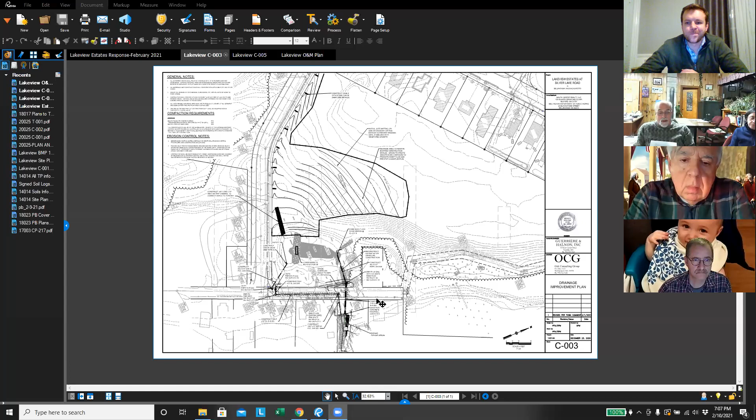So this is the revised plan that the chair was referring to. We briefly talked about it 2 weeks ago. And what this plan does, it expands on some of the improvements that we previously proposed, primarily adding some additional drainage within Silver Lake Road to collect overflow, which may surcharge from the basin during a 100-year storm or extreme storms, to be able to capture that through a new catch basin and pipe that down Silver Lake Road directly to the outlet to Silver Lake.

And one of the thoughts in designing this was to take the burden off of this one inlet, the sediment trap that was installed, I think last year or 2 years ago, which has resulted in some surcharge during extreme storms. So the thought behind this was, again, a kind of belt and suspenders to what we previously proposed, in addition to the additional drainage pipes to convey stormwater from Silver Lake Road to the pond, from the basin, as well as from this sedimentation trap.

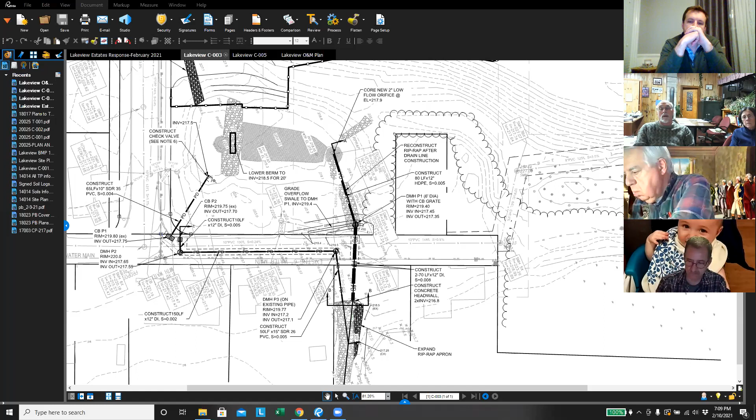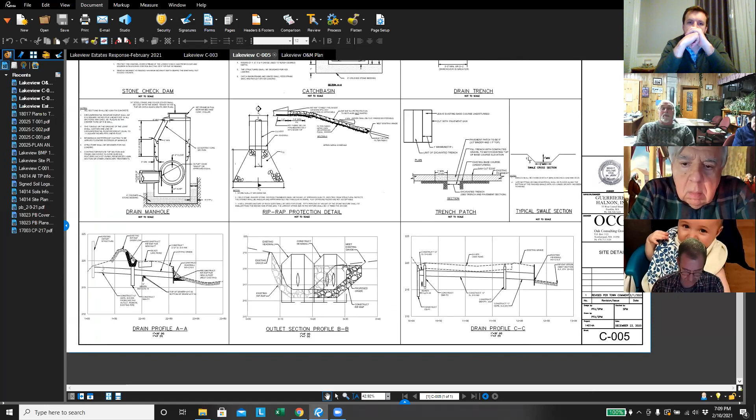We also revised the plan to have a check valve. It's an end of pipe treatment. This was specifically noted by Don DiMartino, something that would be more easily maintained by the town once this is the town's property. So we've added that to the plan. Additionally, we've also added the drainage profiles and sections for the main runs from Basin C, as well as to the outlet to Silver Lake. We also just submitted today an operation and maintenance plan for this whole drainage system.

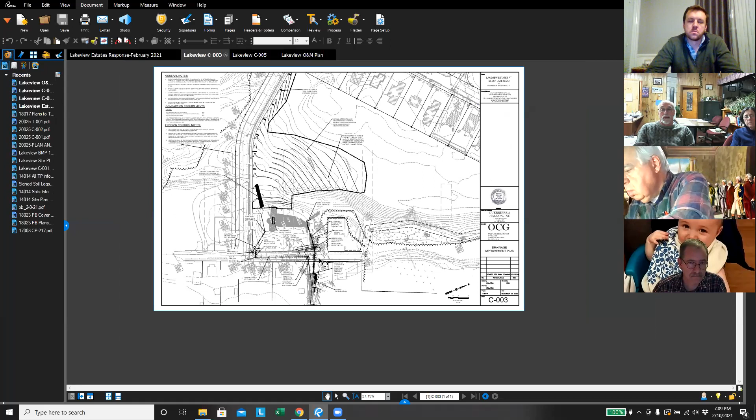That'll help ensure the longevity of the system and be able to maintain it so it operates properly. At this point, as the chair mentioned, we understand BSC hasn't had a chance to fully review this, but we did submit all the calculations in response to their previous comments. I think that's probably about it on my end right now, without some additional questions.

Okay, there was a question that our peer reviewer had relative to review of previously constructed and permitted stormwater management structures. It's the opinion of the commission that the redesign of this basin to correct the deficiencies of the previous constructs renders review of previous iterations of this structure moot. So I don't think that we'll need to have our peer reviewer take a look at what turns out to be well behind us.

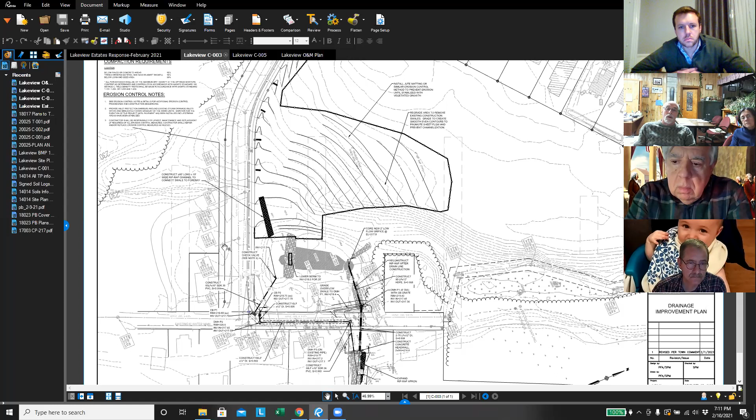It's been our goal for many years to try to correct a situation that has created a lot of hardship for local residents, and to build a structure that will be able to meet and function with the increased volumes of stormwater that we anticipate 10, 20, and 30 years down the road. So that was one of our concepts, and you've actually anticipated several of our comments with the submission of the O&M plan.

We have not had an opportunity to take a peek at that, but I think Frank has some final review to do on the calcs. He and the commission will both take a look at that, but based on your previous work, I'm sure that we're going to find them adequate. If we're not, we'll rely on our peer reviewer to make suggestions as necessary. The one thing, if you could go back to the plan itself, Sean, can you do that? Yep, absolutely.

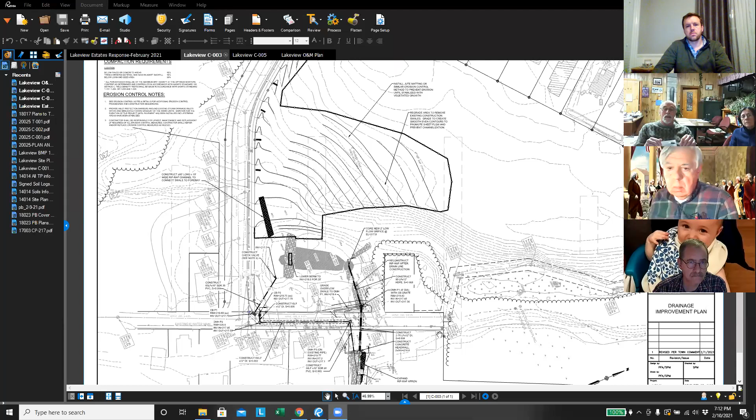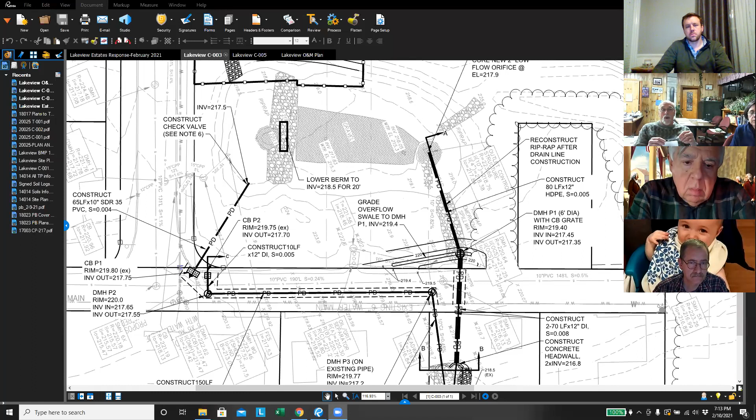I know that a photograph was taken back in November showing the double catch basin collecting all the water that was coming down Candlelight Lane. I don't know what size storm that was, because I know that there were multiple officials from the town who've actually seen bypass there. Mm-hmm. So your proposal to construct that basin right there at the bottom of the slope will address that plus the sidewalk. Yeah. Quick question.

According to the O&M plan, from what I looked at real quickly, it looks like it's dividing the ongoing maintenance in the future, Candlelight Lane versus Silver Lake Road. Silver Lake Road, Don DiMartino and the town take care of. Candlelight, the Association of Homeowners take care of. Is that correct? That's correct. And until the time that the town takes ownership of Candlelight Lane.

Is that anticipated, Don, in your opinion, to be any length of time? My question is, that catch basin is right at the corner. Whose jurisdiction is it? Is it clear right from the start, or is that going to be one of those, you clean it out? No, you clean it out, and then eventually we get it all, I guess.

I will clean it. Don says the town will clean it. Okay, that's just seeing how close it was right to the intersection there. I just thought, well, maybe I didn't realize. I forgot that there was going to be a turnover eventually of Candlelight Lane to it. Yeah, no, it's going to be a subdivision approved by the town at some point.

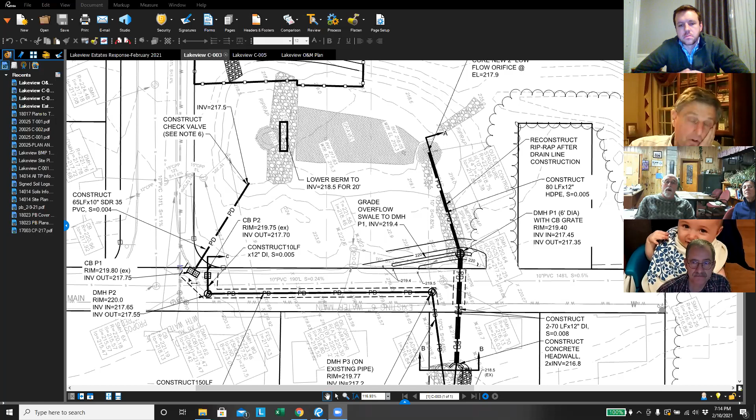And I forget whether the O&M plan has in it the checklist. Sean, is that where the checklist was for inspections of all the devices and the catch basins and so forth? Correct. Okay, you might want to make a note. I put it in a post. I hadn't done that before with the Dropbox that Amy provided. On the checklist, items I think 22 and 23, which is listing all the catch basins and other things that need to be cleaned out.

You have two catch basin 7s and no catch basin 8, but the plan seemed to show a 7 and an 8 on the plan going up the hill on the road there, but it's not reflected in the checklist, so I just thought it was a typo there. Yep, you are correct, sir. Yes, number 23. I'd hate to see some poor inspector get all flummoxed by seeing two 7s and not knowing what to do.

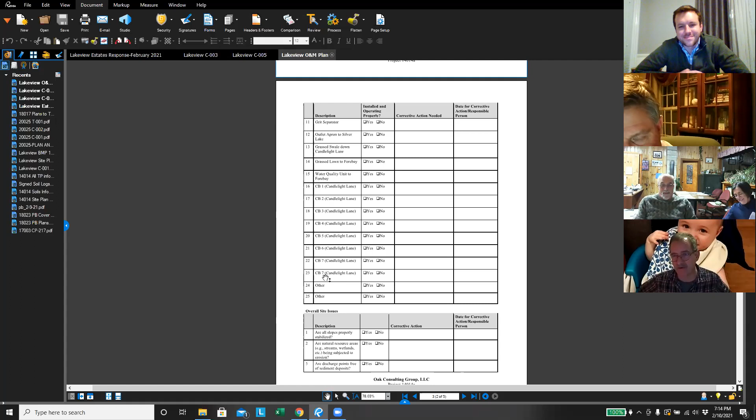Yep, and we will make that correction and send the updated O&M to you. So we do have it right on our O&M figure. We'll update the checklist. I'll defer back to you, Mr. Chair. I got two more questions, but I can wait until you're done, sorry.

Okay, so my question relates to the new catch basin that you're adding to assist in the distribution of a 100-year storm event in the event that we get a surcharge. So in the event that the volume coming out of that double catch basin is too great and it bypasses the catch basin, it will go north to that other emergency structure. Will it go into that structure, or will it go to the regraded drain manhole with a catch basin grate?

Yeah, so everything would drain to this oil grit separator that's already installed. The swale here that you're referring to is an overflow. So this would only come into play in an extreme storm where the water wells up to an elevation of 219.4, and then it would overflow into the swale and into this basin, into the outlet. And the idea here is this elevation is lower than this side of the road. So it would allow a relief before the water welled up enough to overflow into abutting property, which has happened in the past.

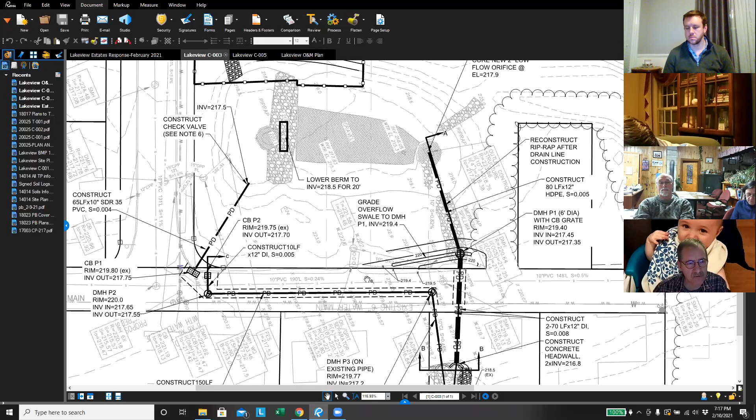Yeah, so Sean, could you roll it up a little bit towards the area that's gonna be regraded, that's delineated there? Okay, so if the dark line on the outside is the siltation fence, is it gonna be graded within that, or is it above that and you're trying to protect that sloped area? Because I was reading the narrative and it talked about protecting the slope with sedimentation barrier and controls during the regrading, but it's the area within that that's being regraded, correct?

That is correct. And the reason why we're continuing the sedimentation barrier around that area to be regraded is to minimize the run onto that regraded area, so we don't get sheet flows that could potentially erode the slope before it takes hold. Okay, could you zoom in to get an elevation reading at the far right side within that area? I thought it was 250 something, right about where that cursor was? Yeah, right about there.

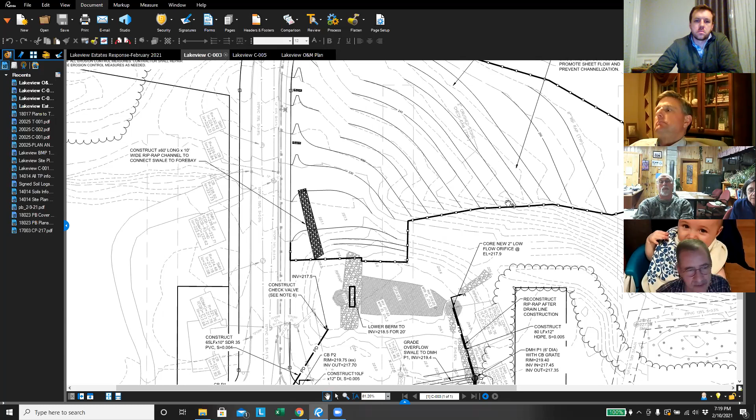250, 252 here. Okay, and then if you go to the bottom where the riprap is going to be put in near the street, the drainage, just before you get into the basin itself, what are the contours down there, 217 or something, 215? Yeah, so this is a 228 contour, a 226 contour, and then blending into what's already there, the 24, 22, 20. Okay, so it's roughly 250 something to 220? So about a 20-something foot drop over whatever that distance is lengthwise.

I couldn't figure it out because on digital plans, it can say 1 inch is 30 feet, but it doesn't really mean anything when you're looking on the screen. All right, I couldn't figure that. But anyway, so that's going to be flattened out though, correct? Is that what the narrative was saying? You're flattening this hillside somewhat to ease the flow?

Yes, we're smoothing it out, and if you see here, there's kind of some tighter contours. The dashed ones are the existing, so we're spreading those out a little bit to create a more uniform slope. The slope is going to be approximately 12%, somewhere in that neighborhood. But also, I want to note, after this is regraded and loamed and hydroseeded, we are planning on matting it, jute mat, that'll help prevent any erosion until that grass takes hold.

So, having gone up and down Candlelight a number of times to look at the basin and to look over at Silver Lake Road with the commission on walks, I'm just sort of mentally visualizing. I looked at the photo that was included with this, which did show the rain coming down the road and so forth, which gives you a little reminder what it looked like. I'm just trying to picture how you're flattening that out with a 20-foot-something drop right now.

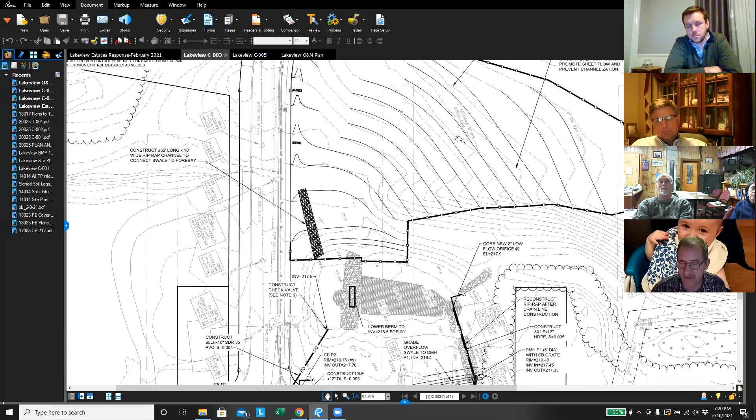Is it going to be like a bowl effect? I mean, it doesn't go up and down. It pretty much comes downhill. There might be a few slight swales, but I'm just not sure how that would be mitigating the flow coming down the hill. And the second part, given the contour lines, how tight they are just to the south, below the bottom edge of the siltation devices, that really has to be protected like crazy, because you're not changing the contours there and it drops quite steeply. Correct?

Down at the bottom here. Yeah, right at the bottom, and up a little to the right more. No, up to the right, the other right. Over in this area, and continuing back to the right side of the plan. Yeah, that whole area, if you look at the contour lines, very tight there. I can only picture it being like you're digging a bowl, smoothed out, away from that sharp contour line to keep it from flowing up and over the top of that, correct?

Yes, and again, the reason for this regrading is to get rid of those swales that were put in there during construction. So that's the whole idea of this plan. And in doing so, flatten might be the wrong word. I think smoothen, if that's a word, make the slope more uniform is really what we're going to be doing here.

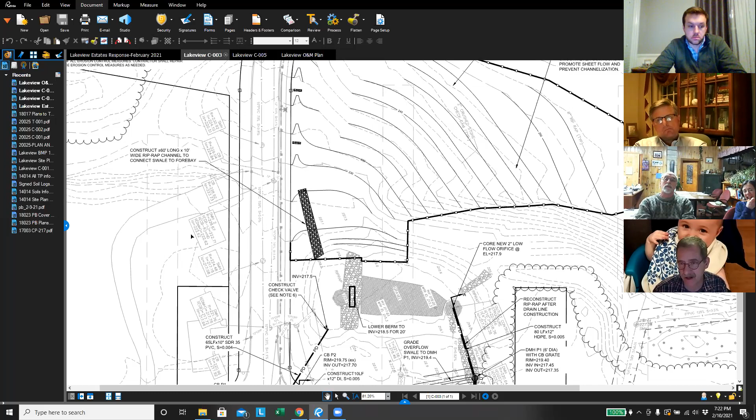Again, I probably have to go back out and look at where the swales are. About how many linear feet of swale are you removing in this reconfiguring? 100 feet, 200 feet? I think probably close to 200 feet. Because it doesn't show those on there. I'm not missing that, right? It's not one of the finer lines that are grayed out, are they? The swales that are there now.

Correct. You can see a little bit of the contours, the way the contours are. Right. This is where the swale is. For the purpose of this plan, I froze that layer. I do have an existing condition, or the site preparation plan that shows that, if you'd like me to put that on. Well, I just wanted to get a sense of it. I don't want to hold up the commission for that.

My last question is directed to whomever is best qualified. The devices that are used for silt and grit removal, do they do something with phosphorus removal? No. Okay, so my concern, maybe it's totally not necessary here, Mr. Chair, is you've got a large development with lots of lawns uphill from Silver Lake, which is already overly nutrified.

And all of this is going to end up in a basin, which is eventually going to flow out into Silver Lake at unknown levels during different times of the year, where it might or might not get more filtration. But if the phosphorus loading becomes an issue, there isn't any mechanical device I'm missing that would actually deal with it, is there?

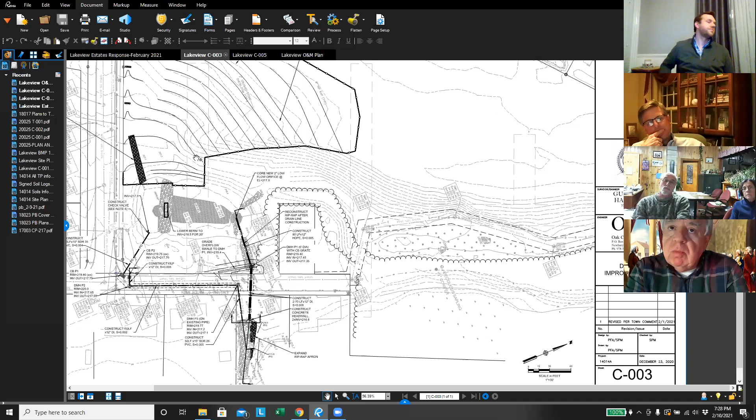A couple things. I'm involved in another project in an area where there is phosphorus. And the two items that were suggested to us to address were holding the first 1 inch of runoff. You can't do that if you can't infiltrate it, and that isn't going to work here. We already tried that, and obviously we've got high groundwater. There are some other smaller things, you know, put in some tree wells and stuff, but really that's a very small amount of phosphorus removal. And I'm not sure with the slope that would be something that's reasonable right here.

And so again, off the top of my head, I don't know of another major way to remove the phosphorus other than doing, like Don said, a major rework of the entire basin, which I think is beyond the scope of what we're looking at here.

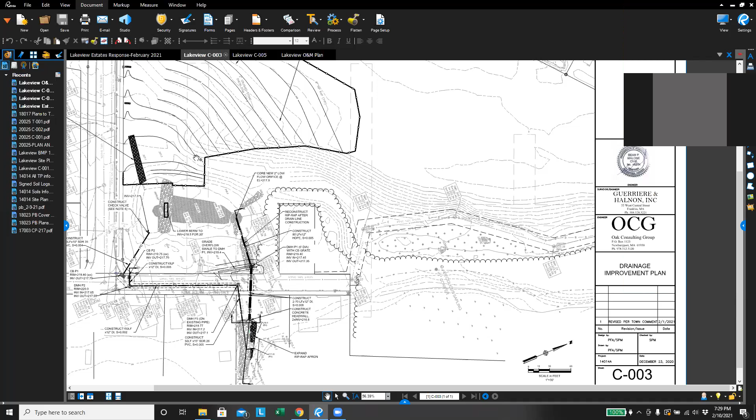And Chairman, we actually did receive that executed scope for BSC's construction review and the payment in full. Okay, excellent. So what we'll do is we will condition the project in such a way that the contractor must respond immediately to any concerns that our oversight managers have. What we don't want to see is a report come out and then the next week, same item on the report, and then the next week, same item on the report.

What we're going to do is we're going to need whoever's doing the actual field work to be responsive to any of the deficiencies that are discovered by our monitoring team. Okay, so I guess the next question I have, we'll look for a continuation date. If I could, Mr. Chairman, just a couple of items. So I have gone through the report and materials. I did look at the O&M section very quickly. I'll be writing up responses.

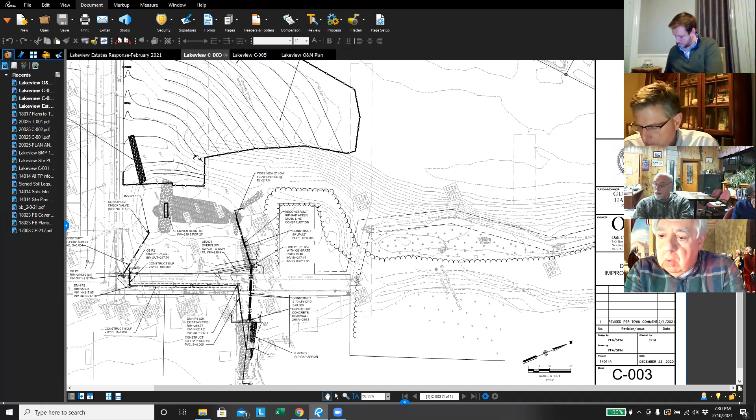In general, I think Sean has done a great job in responding to all the comments. A couple of very minor items that he might want to just take a quick look at. One is the riprap swale going down from the regraded slope. I didn't see it in the detail, but I wonder if there could be some kind of energy dissipator at the bottom of that. The way it's drawn in the plan, it comes down the hill and it hits into the basin. The water is going to be slowed down in the riprap swale, but it might just be a little thing at the bottom of it, a flat area where the water comes down, the energy is dissipated, and it flows into the forebay of that basin.

I looked quickly, so it may be there, but I didn't see the check valve noted in the O&M plan. And again, maybe I missed it, Sean, but I think that should be included in there as well. Okay. Yeah, we may have missed that. And then maybe to respond to Mike's question, I think the slope right now has several areas that channel water, collect a lot of water, it runs down. That water is eroding, and those 1 foot high stone berms or whatever are supposed to maybe slow it down.

I think the idea here would be to grade it so that the water is dissipated, not concentrated anywhere. If you look to the right of where we're looking at, there's some relatively steep slopes. When it rains, water runs down that, and because it's not concentrated, you don't get that erosion. I think the key here is going to be during construction and right after, that area gets stabilized so channels do not form. If they form, they need to be addressed very quickly so you don't have that major erosion.

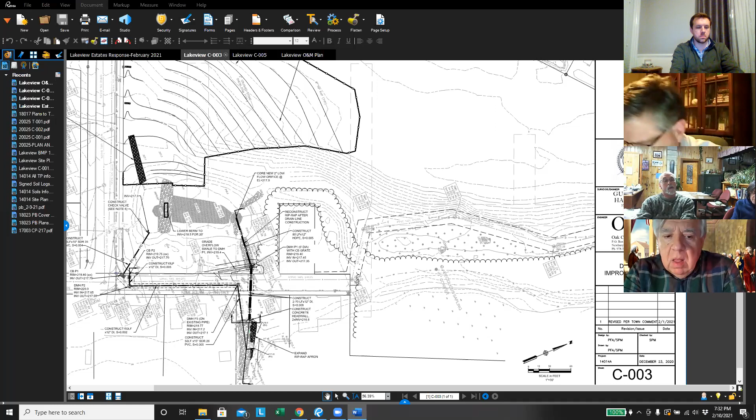And then the other thing I mentioned last meeting, I looked at the new catch basin that's been added. I was a little bit concerned that the elevation is only maybe a half an inch different than the double grate. And then I went back and looked at it, and I realized that right now that existing oil gas separator basically gets everything. It gets the water that runs down Candlelight Lane and turns the corner. It gets all the runoff down Silver Lake Road. We're now adding 2 more catch basins, a double grate and a single. We're picking up a lot of the water that goes down there.

And we've now got separate routes. One goes into the detention basin. One would bypass that area and go into the oil gas separator. One would go into the new catch basin that has its own discharge. So I think this solution provides additional ways for the water to basically get dissipated from this area and alleviate the flooding. So again, I don't really see any major issues with this. I'll put that in writing. And those couple of items, maybe Sean can take a look at so he can address them for our next hearing. Yep.

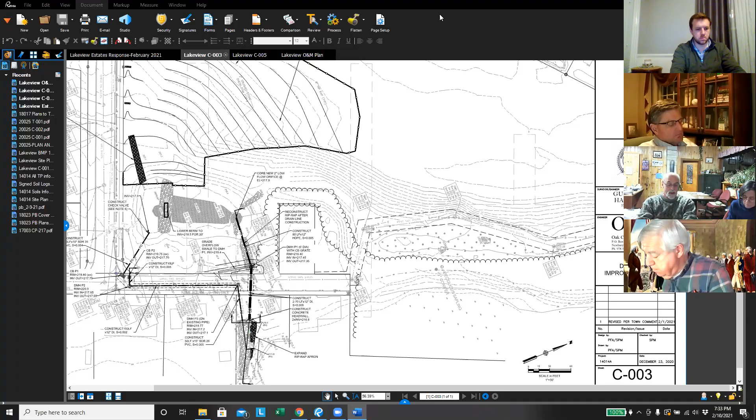Okay, so Frank, what's your time frame on this? Do you think you could have this ready for our next meeting on the 24th? Yes, not a problem. Okay. In that case, I'll entertain a motion to continue the hearing to the... Mr. Chair, I'm sorry to interrupt you. Just to clarify, one thing that was mentioned, I was speaking with the project team today, and so I just wanted to bring this up to put it in the commission's ear, if you would.

I understand the commission's policy of not sharing a draft decision beforehand. One of the concerns from our attorney was this is pretty complicated, in that there's an existing superseding order as well as an existing order of conditions, and this notice is kind of combining the two. So we just wanted to suggest that when the commission does draft a decision on this, that be reviewed by town counsel as well as our counsel, so they can make sure everything's covered. Again, I know it's not your policy, but I wanted to suggest that and throw that out there.

Okay, well, in terms of procedure, a notice of intent was filed with the commission to correct deficient drainage issues. That's what we're going to be writing a permit on. I'm happy to bounce anything we do off the town counsel, but I don't want Jeff Roloffs to be looking at it and start tweaking our words and maybe changing the meaning of what we're trying to do. So I think that it's the commission's policy, and you're well aware of it, we're happy to submit it to our town counsel for review.

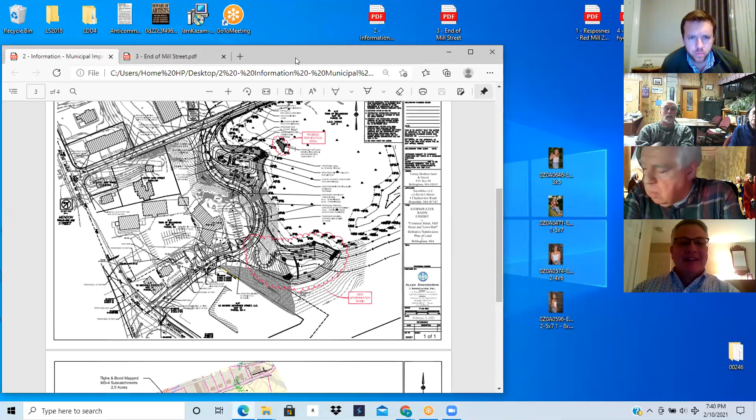Is that being shared? Yep, yes, that looks good. Yeah. Okay. I'm glad it is on your end. Let me see if I can't widen the screen here. So

The area of concern was down in this area behind the Walgreens, highlighted in red. That's a second basin in addition to the first basin that we've had previously before the commission in this location. This drainage basin allows us to handle all of the MS4 subcatchment areas that CHA has been working with the town to try to mitigate. And I'll kind of zoom down to the next exhibit.

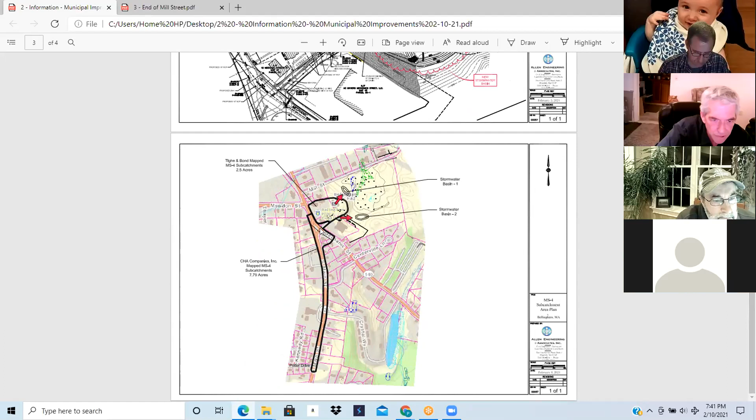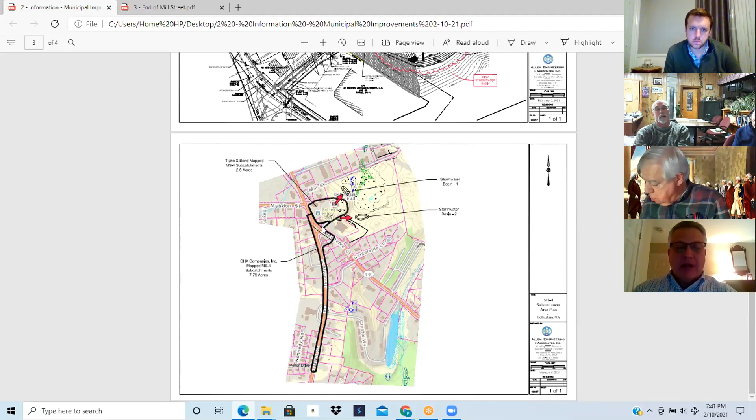This area here, this long area that goes all the way down to Parter Drive and basically at the elevation of the water tower on South Main Street. From that point heading south and the areas at the intersection all will be going to this new basin. Previously, this large area could not fit into the one basin, but now that we've added a second basin, we can now split the town hall's stormwater as well as the off-site mitigation for South Main Street. So the red arrows show half will be going into Basin 2, half will be going into Basin 1.

Very similar shape, a little bit bigger in size, but we were able to run the hydrology that CHA provided us, and we're able to capture it in this location. We've designed that basin with 3-to-1 slopes, interior and exterior, so we will not be needing any sort of waivers for slopes of the basins. And the other benefit is that on the first basin, now that less water will be going to it, we've actually eliminated the 2-to-1 side slope on the back end and brought that into compliance with a 3-to-1 side slope. So this basin will actually get a little bit smaller due to the 3-to-1 slope, but it does handle all of the MS4 subcatchment areas that the town has been looking to mitigate.

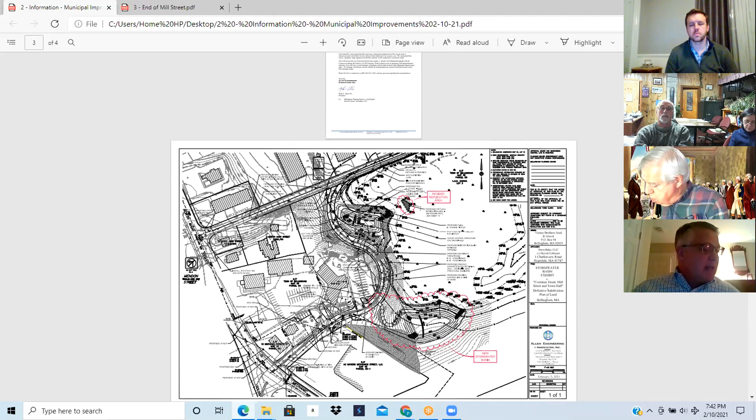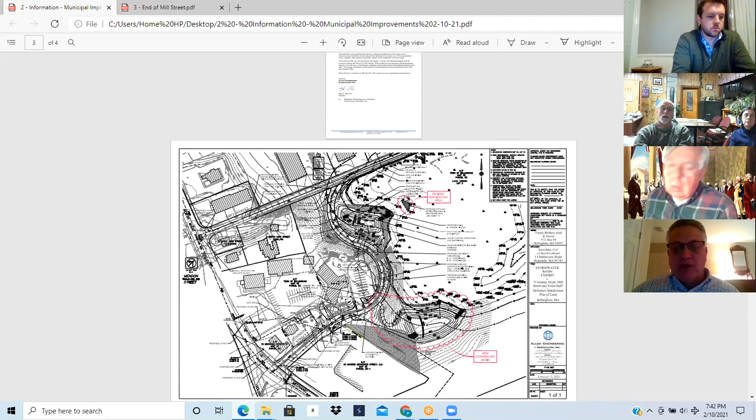That takes me through the second item, the subcatchment area. The third item in our letter was the replication area. You may recall that the replication area was previously called for in an area of a lot of Phragmites off of Mill Street. And the commission and BSC Group had mentioned that an alternate location that wouldn't be inundated with invasive species might be a better option, so we did move it to this location here. You may recall in our site walk, this is where we traversed the slope and began our site walk. It used to be the location of the outfall prior to pulling the basin away 25 feet. It's a very flat area. There are no invasive species, and Sage Environmental has agreed with that location. So we were able to move that wetland replication area to this location.

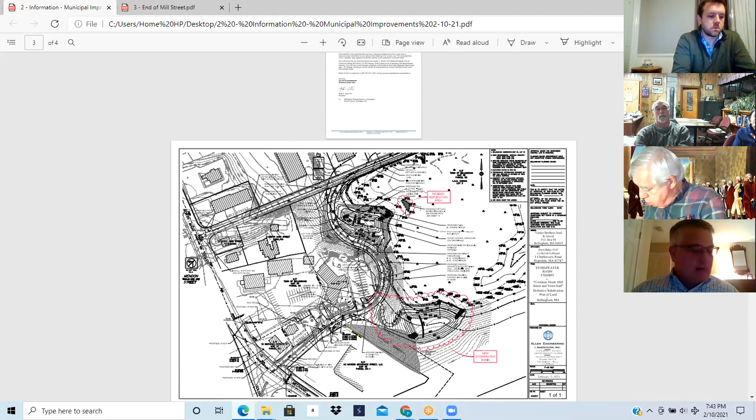The last item that we evaluated was the culvert system underneath Mill Street, at the end of Mill Street. And let's try to pan up here.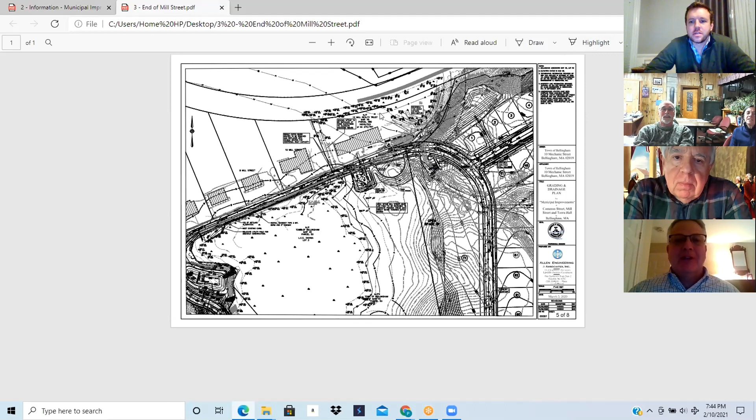Mark, could you enlarge that a tad? Yeah, I'm gonna try. Take your time. You got 7 extra minutes. That's true. I might have to go get my 13-year-old here. Mark, top center. Top center. Plus minus. I'm trying to move my cursor. Jim is the best. Jim knows what he's doing. Oops, that's too much plus. Okay. There we go. Okay.

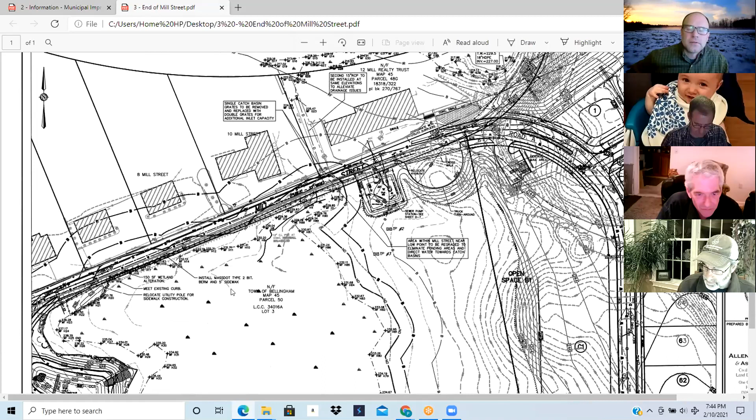So we have evaluated all of the flow that comes into this large wetland area behind Town Hall. Everything that comes into it off-site from the south and off-site from behind Town Hall through these 2 new basins, and a little bit of the slope that comes from off-site for the Red Mill subdivision. And we ran the calculations through the existing stream and the existing culvert. And lo and behold, the 15-inch pipe does handle the 10-year storm event in today's scenario, but it would not handle the 25-year storm event.

So we're going to recommend, instead of running a parallel 15-inch pipe, to simply replace it with an 18-inch pipe at the proper slope, and that will handle the 25-year storm event. It will capture that not only in today's event, because it's undersized in today's no-build scenario, but even in post-construction, the 18-inch will provide the capacity to carry that large wetland area.

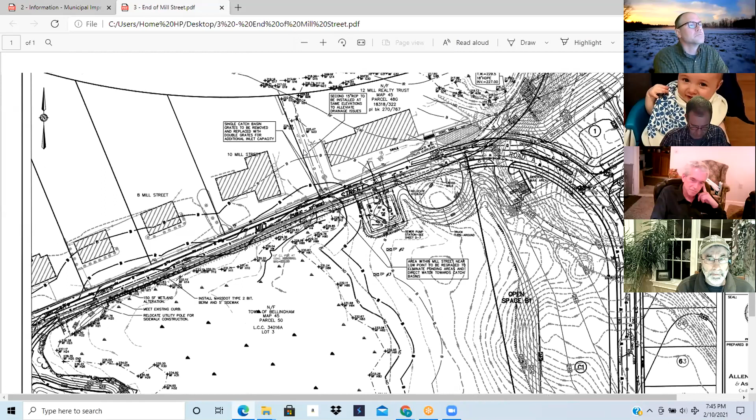Another item we looked at based on our conversation was the existing head wall and the existing riprap splash pad. In talking with Sage Environmental and with our working session this week with Ann, we're going to recommend that, since it's a clean riprap, just go in by hand and remove any woody vegetation that's grown up through the existing stone riprap. We don't want to get a machine or a bobcat in there and do more damage to the BVW, because the BVW actually comes right up to the culvert's edge, as opposed to having a drainage basin outside of the wetlands. It's actually the beginning of the wetland.

And to that end, we're also going to recommend that when we put in this new 18-inch pipe in this location, we pull back the new head wall about 10 feet, just to allow a little bit more riprap and splash pad before it gets to the BVW.

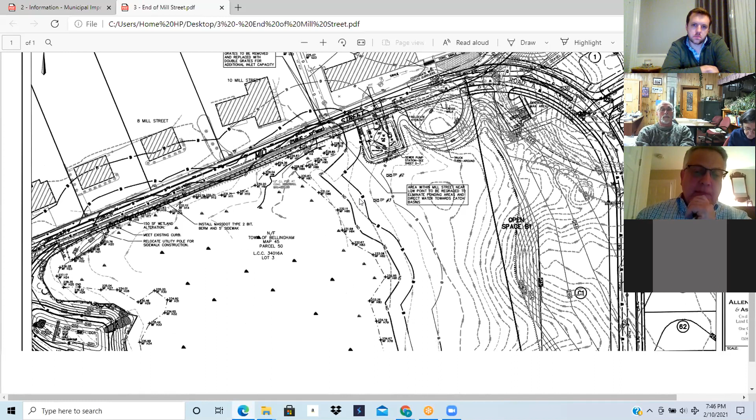So that's that as far as the municipal side. I think that's what the commission had asked us to look into at the last hearing. Any questions you may have, please feel free. Well, you got them all. No, that's excellent. You got them all.

So I think that, of course, now you're going to provide the details. Yeah. And I know that our peer reviewer will take a look at the calculations, but I'm confident that you've got the size of the pipe correctly. Yeah. And of course you'll have details for the wetland replication area, but based on the contours, it's relatively flat there. It's an area that's previously undisturbed, so I think that's definitely headed in the right direction.

And I'm especially pleased with the second basin and being able to capture all of the 3 subcatchment areas that the town was looking to have captured. Now, of course, it's our job to always try to minimize impacts, and this is just a question to see if it might be possible to extend that basin, let's call it Basin B, a little more to the south, even though it would mean more excavation, to minimize the size of Basin A, because it's really jammed in there between the road and the resource area. So any additional space we get would be advantageous. Do you think that's possible?

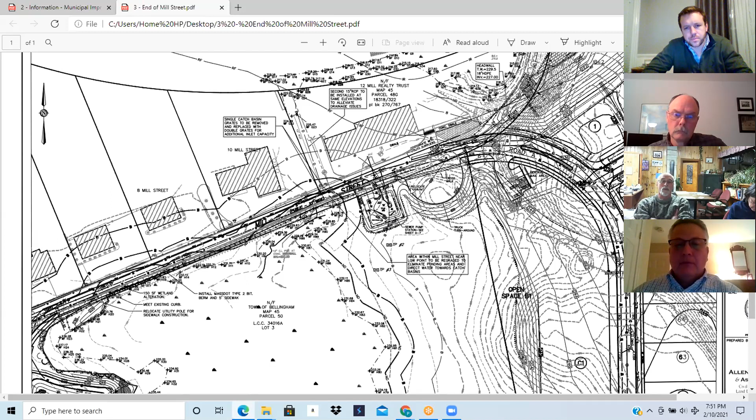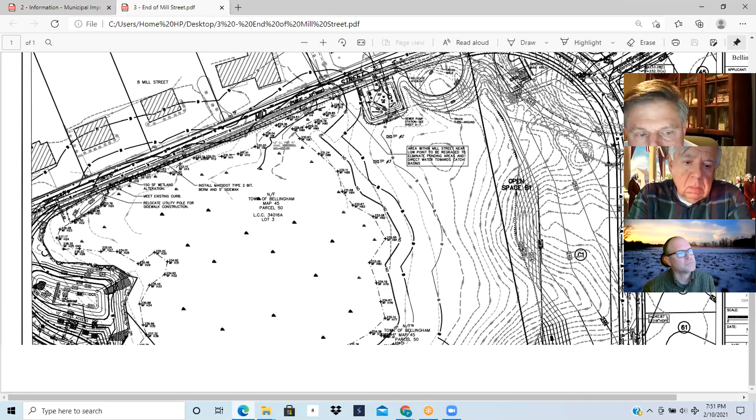Okay. Yeah, that makes sense. And again, once you get the details, Frank will be taking a look at that. Mm-hmm. And so I think you see what we're asking on that other basin. Anything you can do to capture more water in basin 2 might allow you to minimize basin 1. I think we all agree that the concept here is ideal. If it's possible to do it, it would be even better for the commission because we'd be minimizing immediate impacts. So.

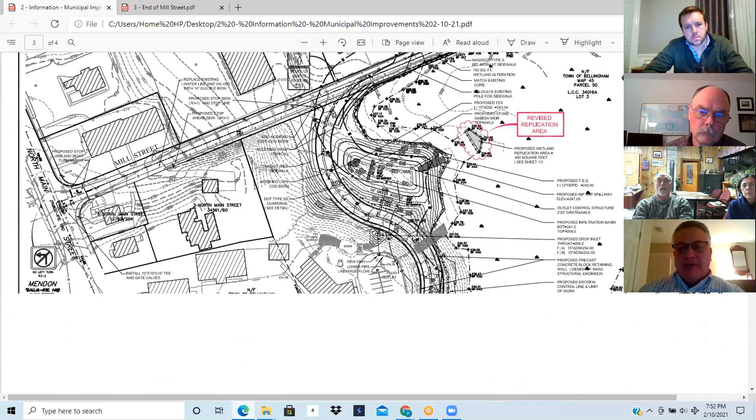Just so you know, we did hold the 25-foot no disturb, and we regraded it at 3-to-1. So it already kind of cut into the volume of that basin just by eliminating any need for a waiver request on the backside slope of this basin. But I'll just verify that we can't squeeze it down a little bit further because of taking all of the water from the MS4 requirements. So was some of the water from the MS4 originally going into that basin? Yes. Two of the 3 subcatchment areas were going into that basin. We pulled both of those and put them into the new basin.

That's really good. Yeah, and so I guess my question is, there's no other way to get some of the Tighe and Bond drainage into the second basin? No, great point. So I actually did capture two subcatchment areas, 2 areas of drainage in this location, Cliff, that go into a catch basin here and a catch basin here. So I did pull off 2 small areas and diverted it to this basin that Tighe and Bond had done. So I did eliminate a portion of the parking lot in Town Hall and did shoot it over to this new basin. Okay.

Yeah, and I don't imagine, because the rest of it goes to that newly constructed basin. The other catchment areas, and forgive me, I don't have the map in front of me, but the new mini common, the parking area, the building itself in the rear parking lot, all of that has to go into the basin. Correct, just by elevation alone. So basically you split the common area, split the town hall roof, and then all of the rear parking area has to go into this location back here. Okay. It's just too low.

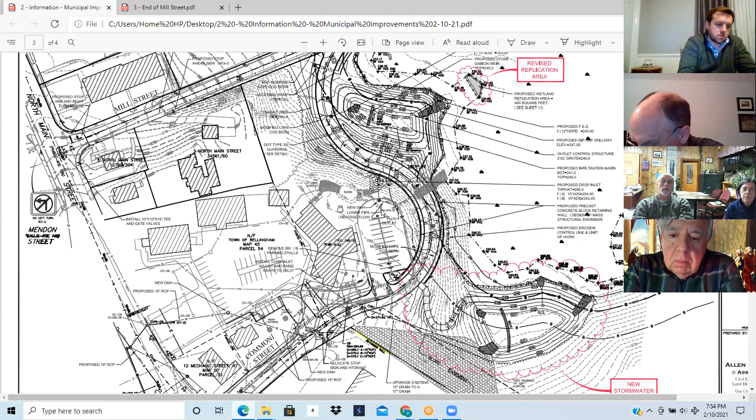All right. Maybe a suggestion, Mark, if you could put together a graphic that might show where the existing areas are now, where they were going, and what you're redirecting to the second Basin B, that might be helpful to demonstrate that it's being reduced to Basin A. Absolutely. So as part of the hydrology analysis, we'll revise our 437-page report, it'll show all the existing condition subcatchment areas and the post-condition subcatchment areas, and you'll see it in HydroCAD and on plan form.

Okay, good. Well, I don't know if Don DiMartino's still here, but I'm sure he's going to be very pleased with this because we sure as heck are. Good. Well, this is why we conduct project review. We got a thumbs up from Don. Okay, very good.

Mr. Chair, a quick question. For Mark, for Basin B or 2, the newly discovered one, that's an infiltration, not a detention basin, correct? Correct, yes. Have you guys done a groundwater analysis? Ground's frozen. You weren't looking at that area before, were you? No, so we'll have to go out and do a confirmatory test pit, but what we did is we basically evaluated it as the same elevation as this basin, took similar soils for infiltration rates, very conservative, the 2.4 inches per hour, and we guesstimated the same depth to groundwater as was in this basin.

Yeah, the depth of groundwater is a concern. It looks great on paper, but if it turns out for some reason in that area the groundwater isn't the depth that it needs to be to do the infiltration, then we've got a less desirable outcome. Correct. At what point in time could you get those results as part of your analysis? We will have them before the hydrology analysis report gets revised. Okay. I know you extrapolated them at the same elevations, and that's usually good for a rule of thumb, but I think Mike's point is well taken, and Mark is already anticipating doing that. So yeah, we will be getting that information, Mike. Thanks.

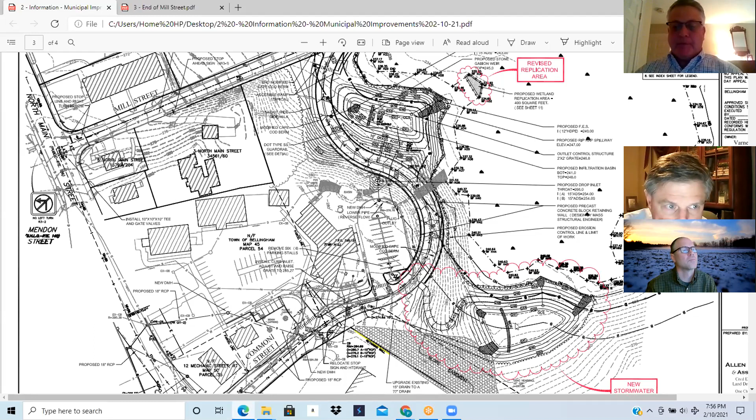All right. Excuse me, Mark, I know it was nice to see the catchment area called out there on South Main Street.

Where was that water going before? Was it just kind of going every which way when it got down to the intersection? I believe it headed north, Don, and if Don's still with us, I believe the Charles River. Yeah, the current infrastructure shoots it towards the Charles River, heading beyond the plaza. So it gets picked up in that plaza drainage system and run down to the Charles? I believe so.

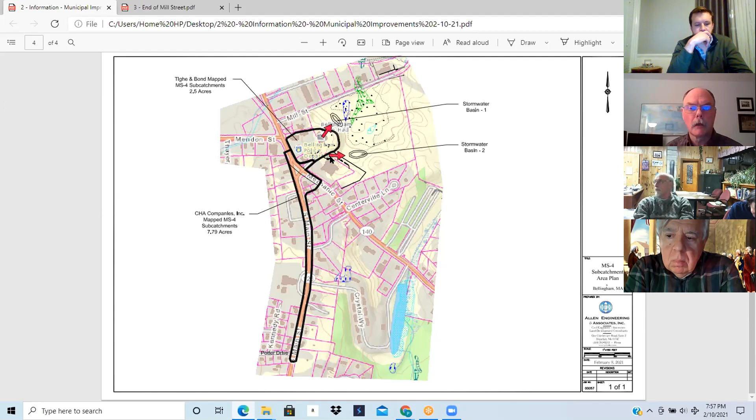So it's a major improvement. So we're basically intercepting like, I don't know, 5 to 7 acres of MS4 water and capturing it before it builds up a huge head and heads down to the Charles River. It's a big deal. Great, thank you. All right, so any other questions? Good. Okay.

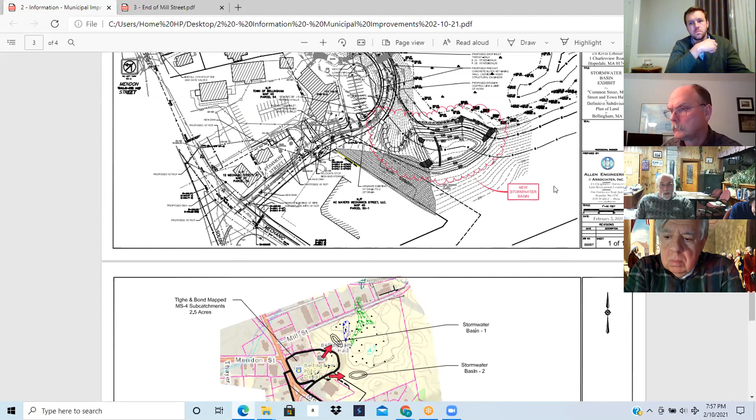There's not a whole lot of additional review for Frank, I don't think. But of course, yeah, I mean, he's right. We will have to see the soil test pits. What are we anticipating here for continuation? I think it would be wise as last meeting just to sort of run it concurrently with the abutting project, I'd say another 2 weeks just to keep them both on the same track, or whatever the next public hearing is.

Oh, okay. I think there's less work to do on this one than there is to do on the actual Red Mill site. Correct. We may just go to the first meeting of next month. I was thinking along those lines, but I just want to make sure everybody has enough time to provide and review information. Do you think that might be more reasonable? Yeah, I do. Especially getting the test pit done in the tundra snow-like conditions. It's creating havoc for us in a couple of other sites, though.

I bet. All right, so if that's the case, then what I'll do is entertain a motion to continue the hearing for the North Main Street, Common Street Access Road to the evening of March 10th at 7:20. So moved. Second. Discussion. All in favor? Aye. Aye. Aye. Okay, by unanimous vote. Except for me. Oh, that's right. Except you. Okay, a point of order here.

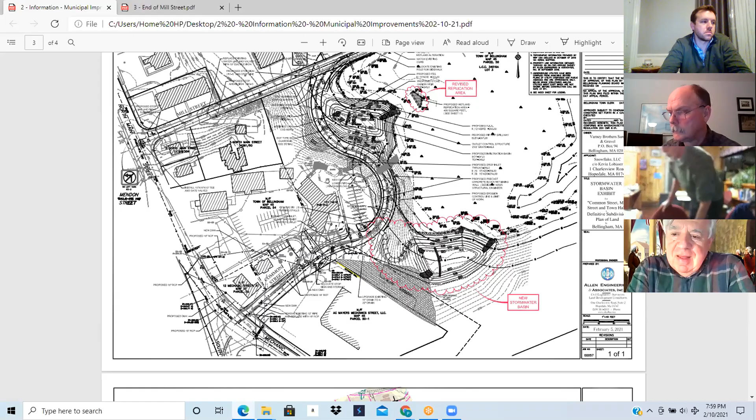Ariane did not vote. I forgot to ask her to recuse herself. I was confused. I thought it was a separate project because of the portion that was being talked about. Yeah, essentially. So I recused myself belatedly. Okay, but you did not vote, and so I think that that's okay. Okay. All right. Where is next?

I think Mr. Allen will appreciate the reading of the advertisement this time. The Bellingham Conservation Commission will hold continuations of public hearings in accordance with Mass Wetlands Protection Act, Mass General Law, Chapter 131, Section 40, and the Bellingham Wetlands Protection Bylaw, and the notice of intent for the proposal to construct roadways, associated utilities, and stormwater management system for the residential subdivision entitled Red Mill on the Charles, consisting of 109 single-family dwellings and 54 townhouse units.

The proposal includes alteration to bank, to border vegetated wetlands with proposed replication, land under water bodies and waterways, and alteration to the riverfront. The proposed project is located at Assessors Map 51, Parcel 13, Mechanic Street and Mill Street, Bellingham. Mark Allen, Allen Engineering, Hopedale, Mass. has submitted the filing on behalf of Kevin Lobiser, Snowflake LLC, Charlesview Road, Hopedale. The continuations will be held online via Zoom on Wednesday, February 10th at 8. And I recused myself from this one as well. Right on time, okay.

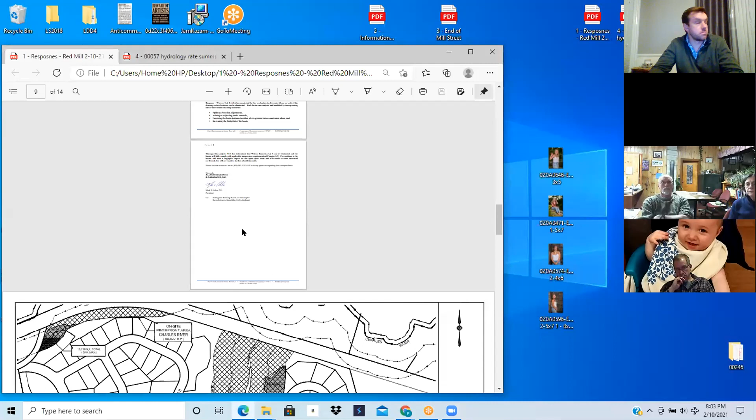Okay, I think we got it running.

So the first exhibit basically shows you where our progress has been with the riverfront area. As you know, new construction rules are basically 10%. It's a very mathematical approach. It's basically 10% of the area that you have on the property, excluding stormwater controls. So we've actually mitigated a bunch of areas on site. We previously had, I think, 13.5% of calculated riverfront area altered. So we dropped that 3.5%.

It did result in one major change, and to the detriment of the applicant. We have lost 3 lots in the riverfront area, and we have now sort of looped the road upon itself as opposed to providing another 350 feet of road through that riverfront and 3 additional single-family house lots. So the infrastructure shortened, and the single-family homes have lessened by 3.

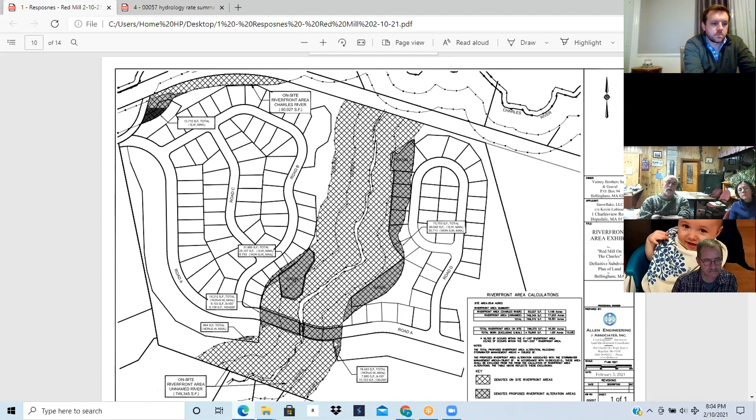Other areas that we also captured in removing the 3.5% of riverfront area: we extended this retaining wall along the south side of the crossing so as to minimize impacts to the riverfront area. And other areas that we minimized were off grading to the riverfront area associated with the Charles River on the opposite side of the train tracks. So those 3 areas got us under the 10% threshold for new construction mitigation.

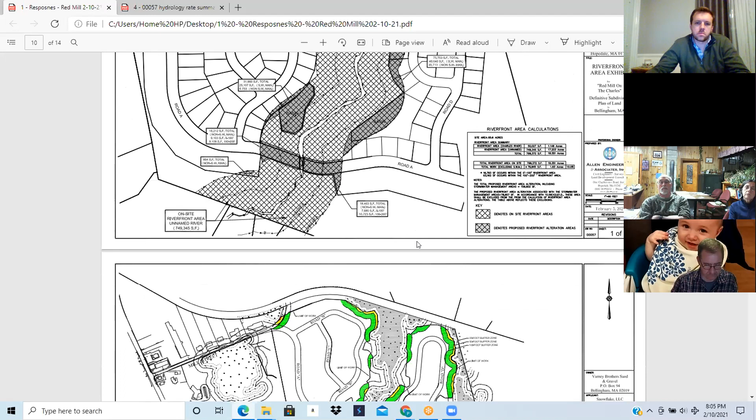So I won't dive deep into the letter report that we provided you, but that is the gist of the direction we want to go with, and we want to take that same approach with the other outstanding items on the project. One of the other outstanding items of the project is the buffer zone impacts. And we put together an impact analysis for you and color-coded all of the buffer zone impacts. I'm going to zoom in here.

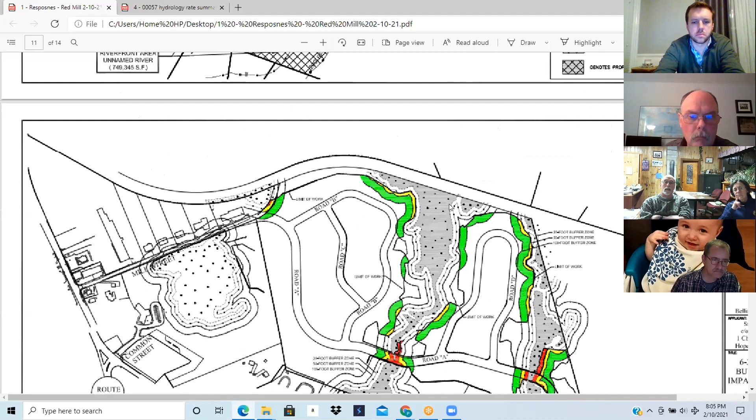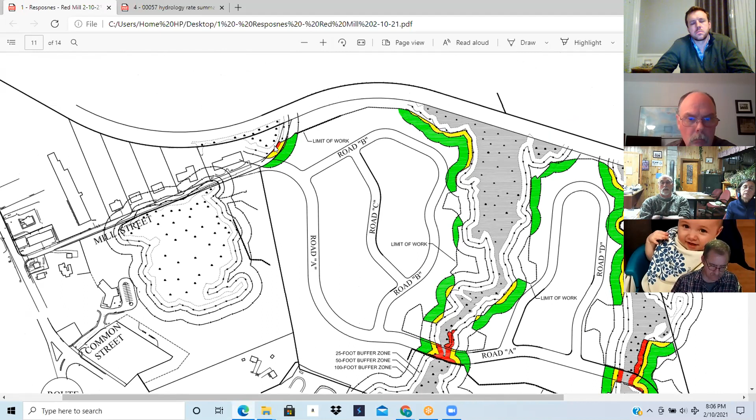In red, you will see that we have obvious impacts at the 2 stream crossings associated with the stream, the road, and 1 small area just so we can get the elevation of the basin to get into the offsite wetland area in this location. So we've reduced the buffer zone impacts on this project by 20 to 30% from the original design of the subdivision, and the majority came from again pulling out of the riverfront area along the corridor of the unnamed stream.

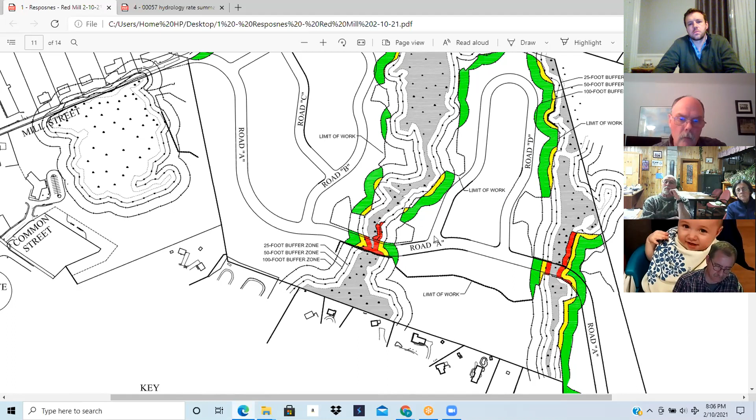One of the items that this image doesn't capture is there is no replication associated with this stream crossing. This will be removed, and it's actually less impact in the 0 to 25 foot area. We just miscalculated the amount of BVW altered. It's actually land under water as opposed to BVW, so that will be removed, and it's another savings that we don't have to cut trees to plant trees in that location. So the total buffer zone impacts have decreased significantly.

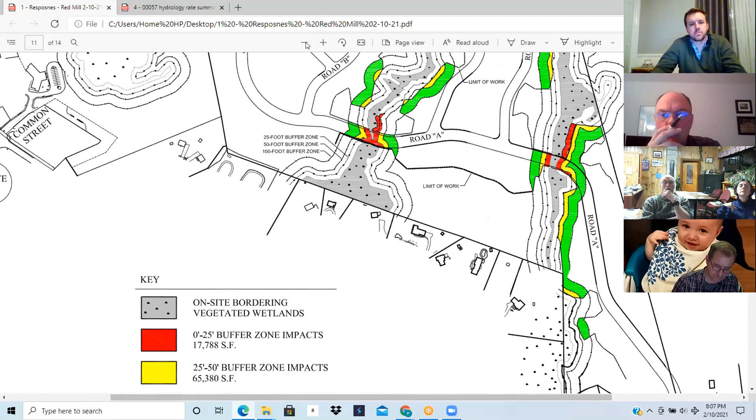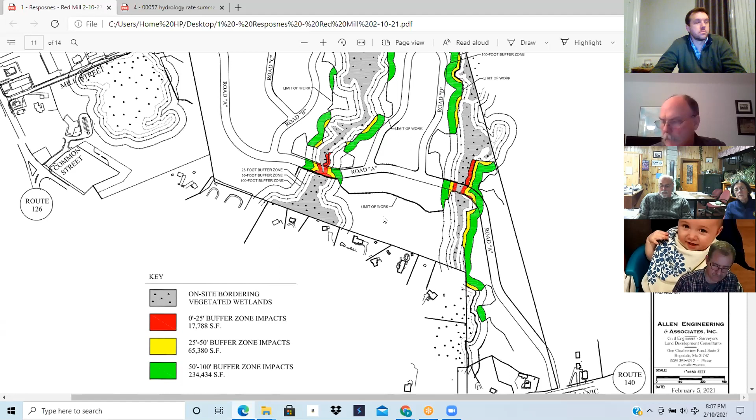And we've also proposed some mitigation to these buffer zone impacts. So the areas in red of about 17,000 to 18,000 square feet represent the impacts to the 0 to 25 foot buffer zone with the wetland crossings and 1 outlet. Mike Dryden has gone through and scrubbed the entire site and tried to find areas where we could replicate the existing vegetation on site and replant in areas that have been previously altered in buffer zones. And he did find an equivalent amount of about 18,000 square feet associated with different vernal pool buffer zones. And we're going to propose planting in kind in those areas.

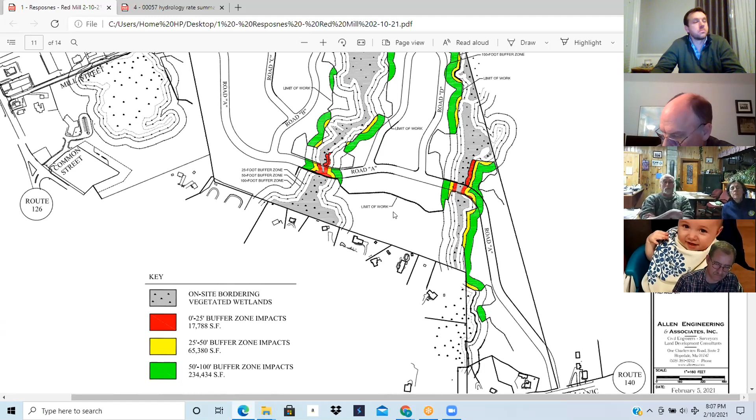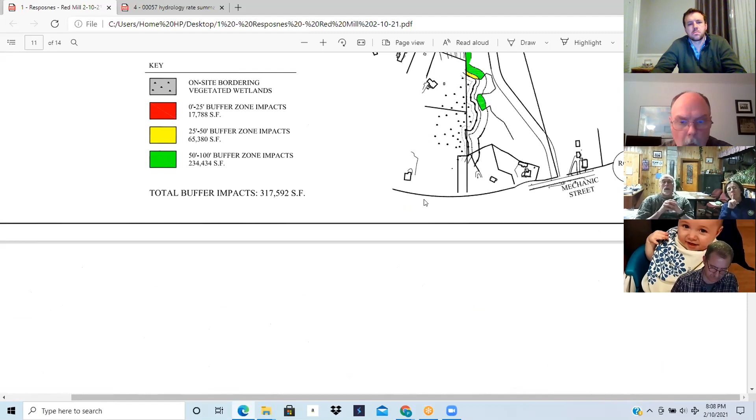I don't mean to interrupt. You don't, by any chance, happen to have a concept plan of that, do you? I do. Let me just make sure I do. I don't want to lie here. I don't want to get you off of your track. Yep. Okay, if you're going to get to it, we'll get to it.

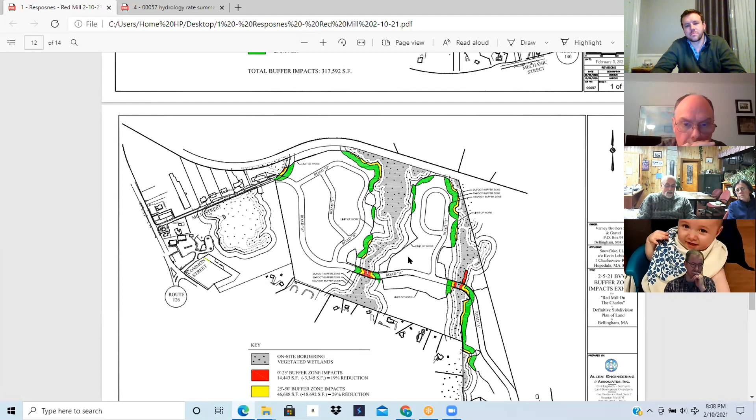Okay. So this plan, as it regenerates, is the new layout. You'll notice that there's very little impact to buffer zones in this location, with what we call a lollipop road layout as opposed to a paperclip layout, which extended down and came upon itself. So the big savings was riverfront area. We were able to pull the basin out of that location, eliminate 3 single-family house lots, and provide a better overall plan for the riverfront area.

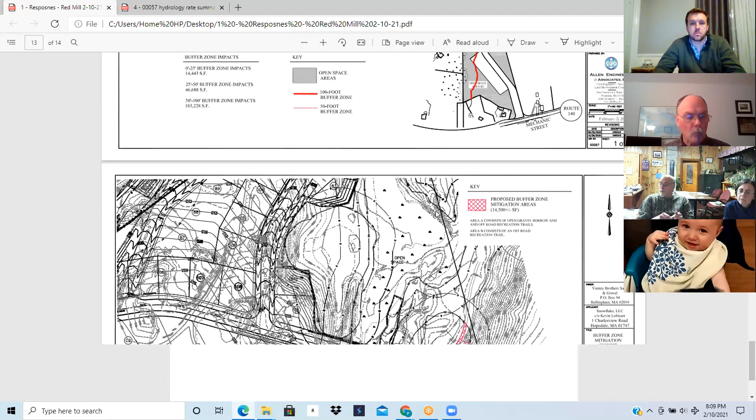We do also want to note that, as you know, the 40% of open space is being retained in perpetuity. We've actually provided about another 6 acres of open space upon that. So we want to just let the commission know that we've heard the concerns and try to maximize the amount of space that we can preserve in perpetuity in open space.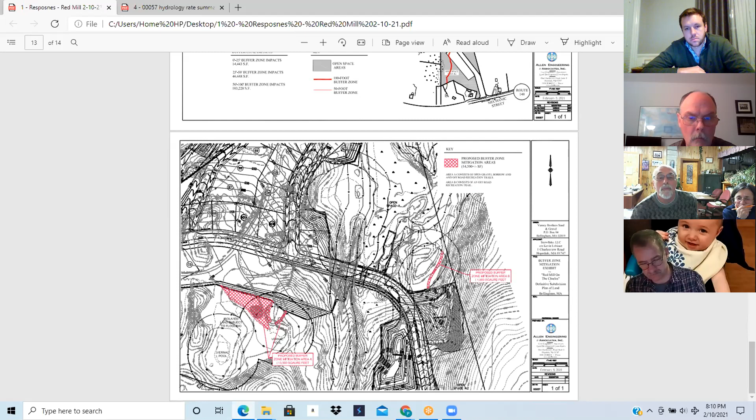This graphic, Cliff, as I think was where you were going, the proposed restoration areas. We found this area in the back that is currently a former gravel pit operation with no cover. So we're proposing to mitigate areas along that area and areas along former cart paths that don't have topsoil to be planted with topsoil and have trees replanted in those areas.

Another good couple of notes to point on drainage analysis. The commission asked us to look into the waiver requests, and I believe we had 3 waiver requests at the last hearing, and those pertain to alteration in the no disturb areas. And there were 2 waivers associated with sizing of basins for frozen ground condition and an additional 1 foot of freeboard. So we did go back to the drawing board, and we basically resized every basin, every outlet control structure,

and we're confident we do not need either of the 2 stormwater management waivers. The only waiver we're going to request from this commission will be simply for the crossings of the roadways and work, to get in and out of the 2 crossing areas. We've actually increased the size of 4 out of the 8 basins. We've adjusted the orifices at the outlet control structures, so every basin will now have an extra foot of freeboard, and we'll be able to handle the frozen conditions. So we will be eliminating those 2 waivers from our NOI.

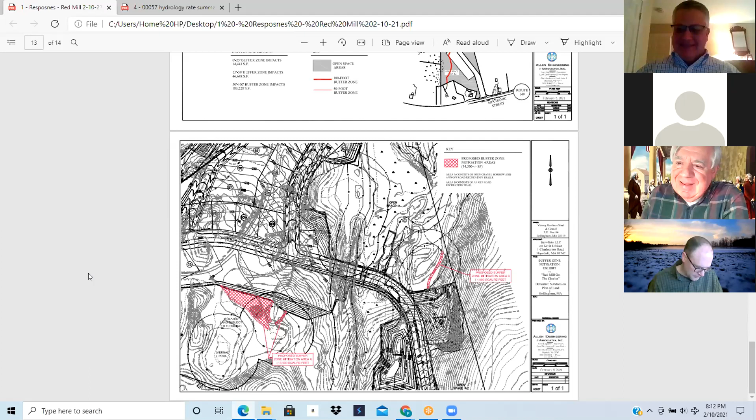I agree. And we appreciate that. You can thank Kevin. Thanks, Kevin. Okay, so I know that... You are welcome.

We just hope that this sort of speeds up the whole permitting process. We're not going to have to do the field work. We're not going to have to debate upon waivers. It's just basically a clean drawing with very minimal impacts to the wetlands. Yeah, I mean, there will be additional field work required. Obviously, we're going to have to go out and take a look at the areas where you're going to have your buffer zone enhancements. We want to make sure that they're appropriate for that. But that'll give you time to develop a planting scheme and a methodology.

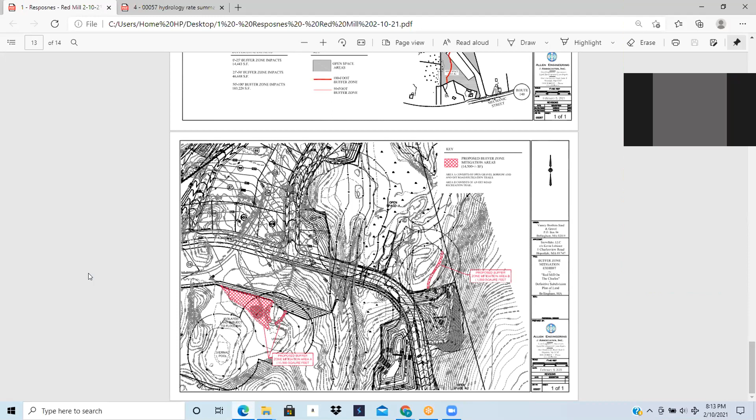I think that generally speaking, we're headed in the right direction. And, just to be clear, I don't feel that the Conservation Commission has ever really been obstructionist. Yet we really do our very best to try to make sure that we're going to have a project that will be viable in the decades to come, and we're moving in that direction now, and I'm pleased to see that.

Yeah, I'm glad to see we've narrowed the gap between 99% and 100% on the plans. Sorry, had to throw that in there.

So, are there any other questions? I know Frank, our peer reviewer, hasn't really had an opportunity, so what we'll do is, based on these concepts, if our peer reviewer has some comments that might tighten the direction, that would be helpful. I think that in terms of much of what we've seen here, obviously, if we don't need waiver requests, that was a tough nut to crack.

And from our perspective, trying to anticipate what's going to happen in 30, 40, like we did with our earlier hearing, we're trying to look down the road and accommodate larger events so that in 20 years, the town isn't like, oh my God, how come they didn't size this basin properly because it's washing out? So this is good.

We're moving in the right direction. Yeah, so with that knowledge and with the commission's common acceptance of our concepts, we look forward to putting the nuts and bolts together on a set of 60-plus sheets with this project, and the 15-plus sheets on the municipal side, getting all the new drainage reports over to Frank, and hopefully putting together this last set of revisions, and making sure we've crossed all the T's and dotted all the I's.

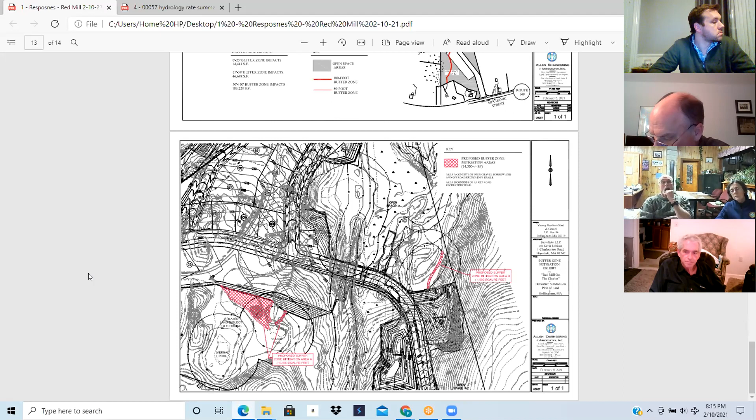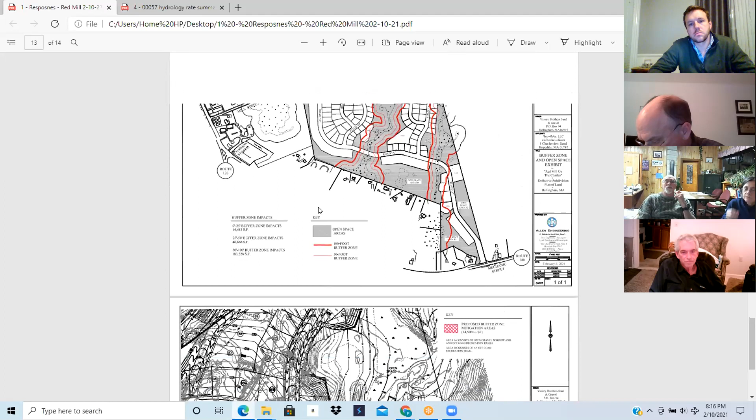I will just make one little note. I did some preliminary review on my own on behalf of the commission for the basins. I believe it's Basin 4. Basin 4 is in a water resource district. Your test pit at the elevation for Basin 4 went down 120 inches, and that, I think, accommodated only 2-foot separation. We need 4-foot separation to groundwater. You might need to extend that test a couple more feet just to make sure, because it's in a water resource district.

Yep. But you can double check my calculations there, but that's the only one. Everything else, all the holes look good. The materials look good, and I anticipate that there'll be no problem there. But just to be sure.

Which well is that for, Cliff? The Water Resource District? It's across the Charles. It's a zoning overlay district. So we have a well across the Charles. So it's not in the 200-foot area around the well, but it's just the town zoning water resource district. Gotcha. Thank you.

Okay. So no further questions or comments? Then, in keeping with the applicant's desire to keep these two projects dovetailed, I know that this is one project with the planning board, but it's two separate notices of intent with us. But we can continue the concurrent review until we get to the point where we're ready to issue a permit. So I'll entertain a motion to continue the hearing to the evening of March 10th at 8:15.

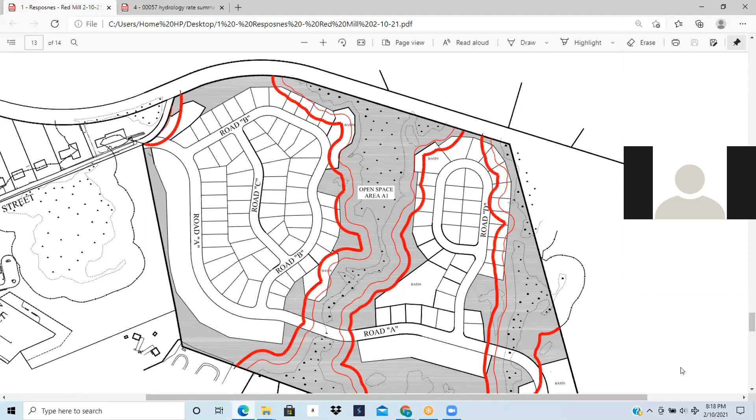So moved. Second. Discussion? Okay, I don't think that was an objection. So all in favor? Aye. Aye. Opposed? All right, by unanimous vote. So Mark, we'll be seeing you on March 10th, but I'm sure we'll be hearing from you much sooner.

Absolutely. Thank you so much. Okay, have a good night. Thank you. Take care. You too. Thank you, guys. Good night. All right. Thank you.

Before we move to the next hearing, I just want to mention that our long-term conservation commissioner, mentor and friend, George Holmes, passed away this week. It's a sad one. Many of our members did not know him, but he was one of the original conservation commissioners in the Commonwealth, appointed right after the Conservation Act was enacted. Served as a longtime member, became conservation administrator for a decade in the town of Framingham. Came back and filled in here part-time after he retired from Framingham. Highly competent and all-around nice guy. I'm going to miss him.

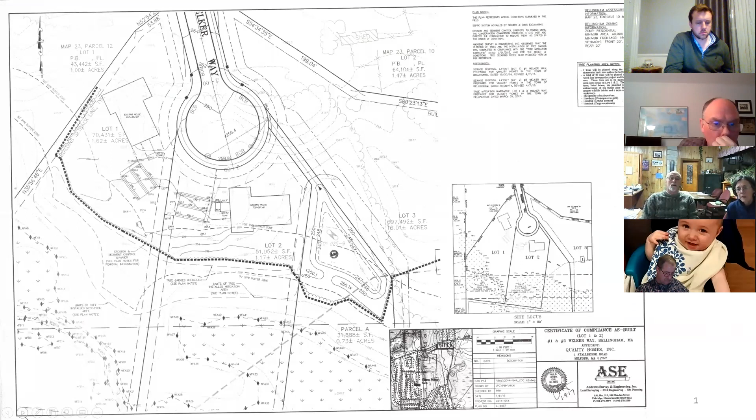This is just my lot plan. For this parcel here, I'm going to go into a little bit of a cutout, a zoomed in view, where I marked these. These are my measurements. I didn't have a surveyor, so I did my best civil engineering job to mark where I think these are based on the drawing. Here's where they would fall on the map.

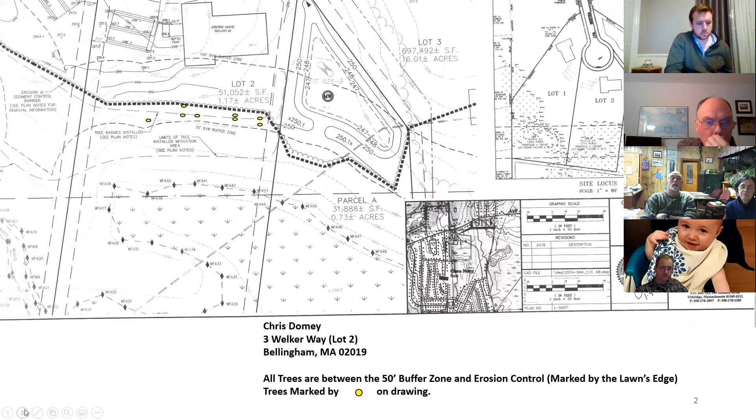Ann and I had a conversation earlier about maybe planting something in place of what we're removing as an option, and my wife and I are obviously completely open to that. I looked at the list of what the builder had put in and some of the recommendations, and I think some hemlocks would go well in that area to replace what we're taking out and get rid of some of these trees that overhang the house and whatnot.